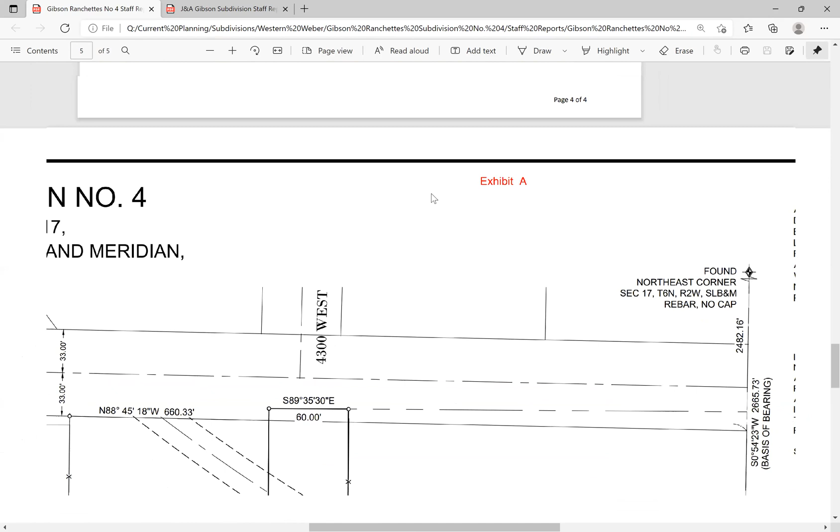So what this proposal does is create lots 1 and 2, which would be officially platted as building lots. There are already lots of record building lots because they have homes, and they already have the services they need as far as water, all the residential services. As you can see where my cursor is, they're just cleaning up this line—this label says original lot line—so they're basically officially platting these 2 lots.

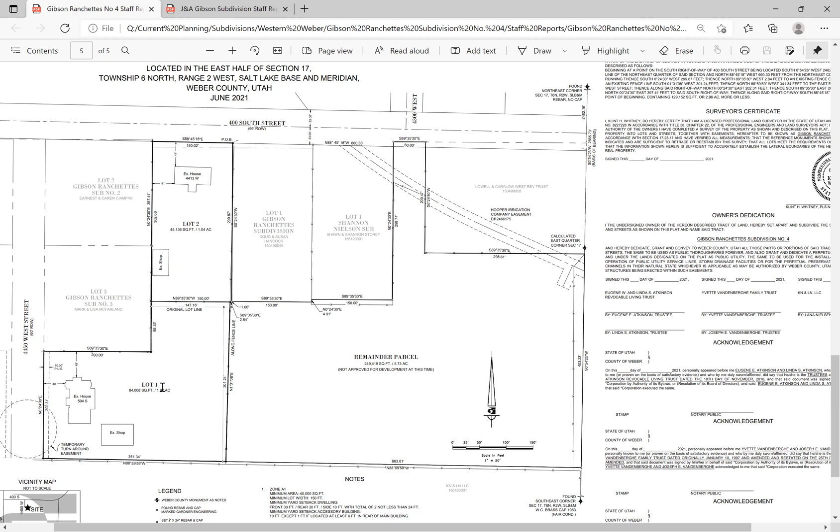You have this remainder parcel that is just over 5.7 acres. So what planning looked at was mainly to make sure it meets the zoning site development standards for the A2 zone, which it does, and that the plat meets the Weber County Subdivision Code requirements, which it does. As it stands, we have approvals from surveyors, engineers, and fire for this. It's a pretty simple amendment here, subdivision. So with that, planning staff recommends approval.

Okay. Is Mr. McFarland here? Nope. Okay, well, I am going to recommend approval of this subject to the conditions and findings outlined in the staff report. So it stands approved.

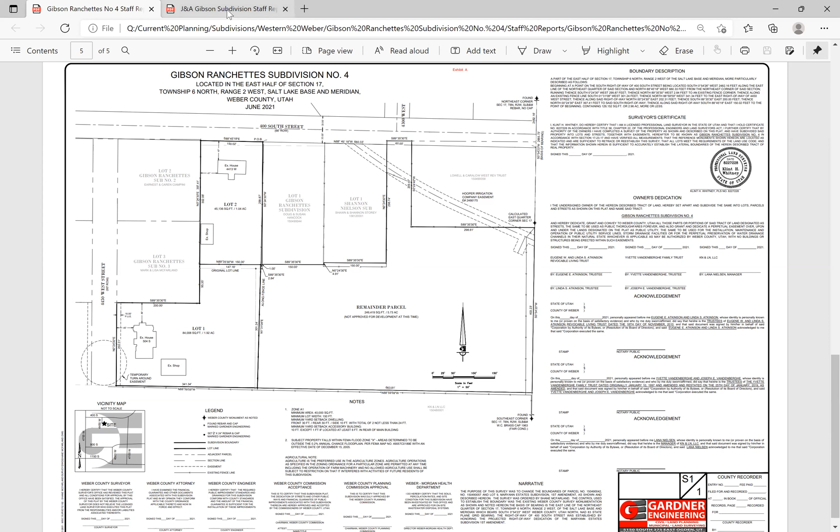Next item is consideration and action on a request for administrative approval of the J&A Gibson subdivision, consisting of 2 lots. And Felix, you're going to be presenting this one as well?

Yes, so this one is in western Weber again. It's a residential subdivision. This one is looking to create a new lot from an existing large parcel. What they're proposing to do is pretty standard: this new lot that's being created fronts on a public road that's fully improved and up to the county standard.

With this being a new lot being created, we require that they show us they have service from Taylor West Weber, service from Hooper Irrigation, and they've provided those required letters. Also, Central Weber Sewer District will provide the sanitary services for this.

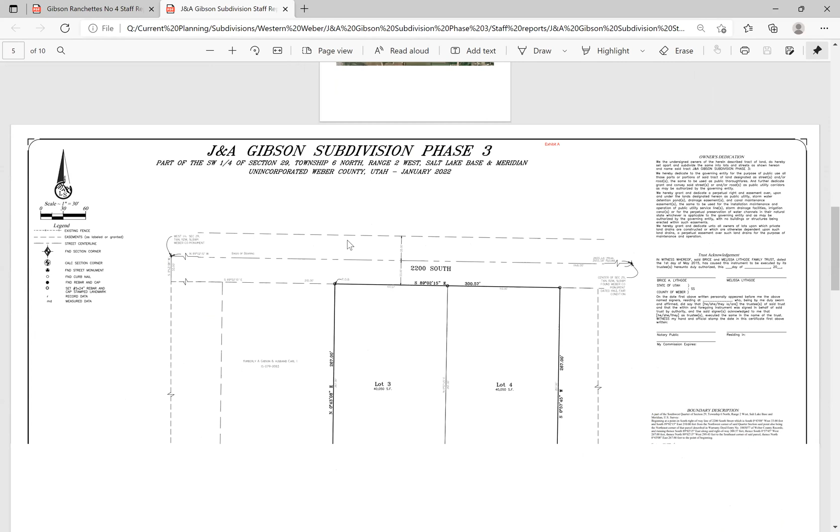Go to the plat—this one as well. So here are the lots showing kind of a layout, both lots fronting on that public road, 2200 South. Both meet the standards for the A2 zone. With that, planning recommends final approval of this proposal.

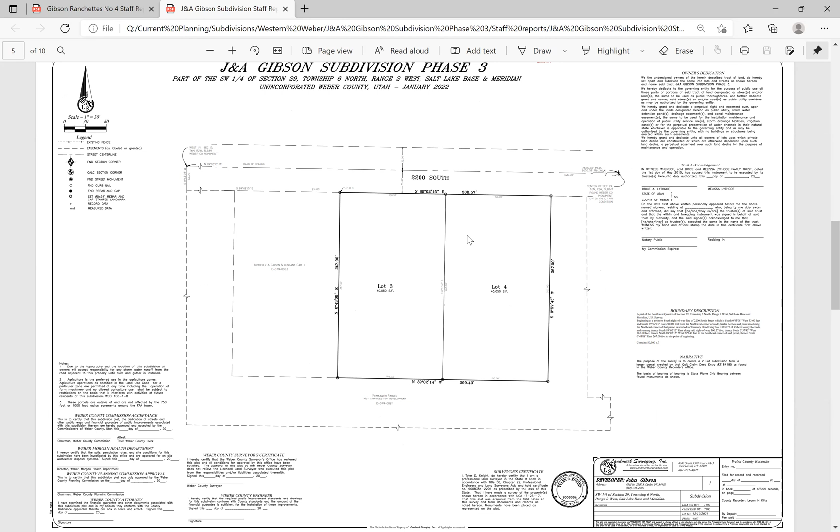No road dedications necessary for this? Nope, not.

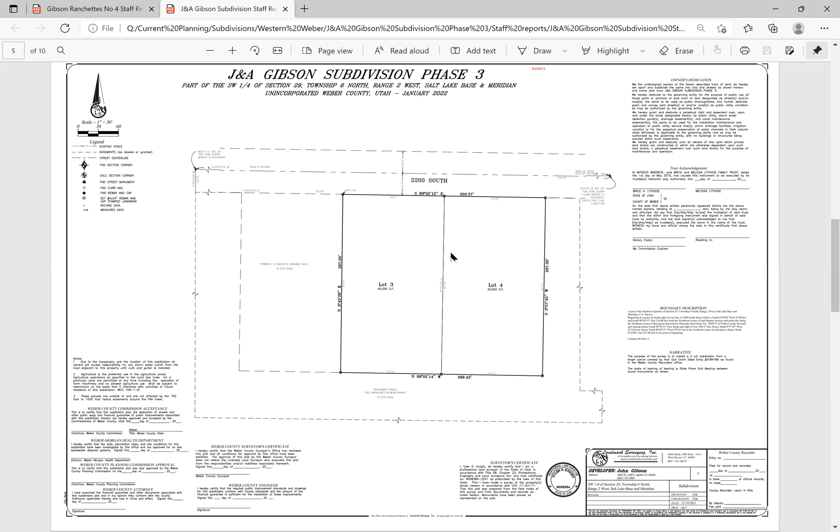Kobe Smith, do you have anything you'd like to add? We submitted a new plan yesterday, with marks the surveyor made. So this is just the older survey with the older plat that we originally submitted, and now everything's been fixed and the new plat is now in.

Okay, well, I'll recommend approval of it, subject to the conditions and findings outlined in the staff report. And we'll move on to...

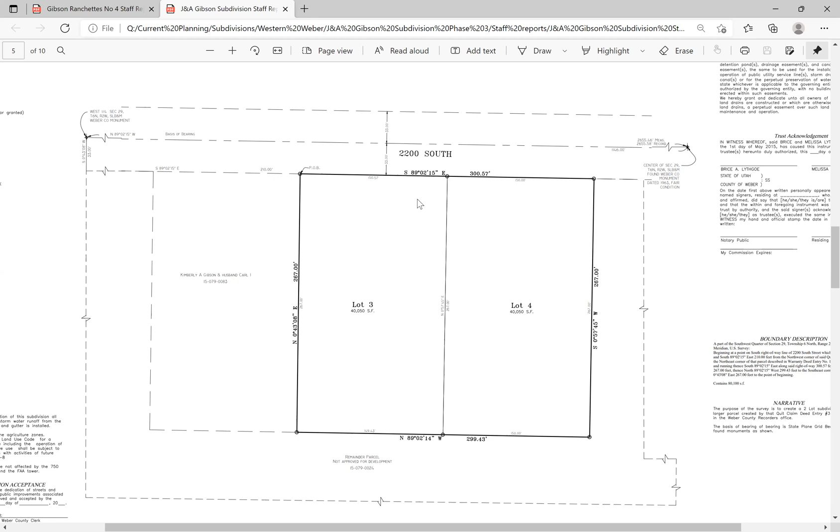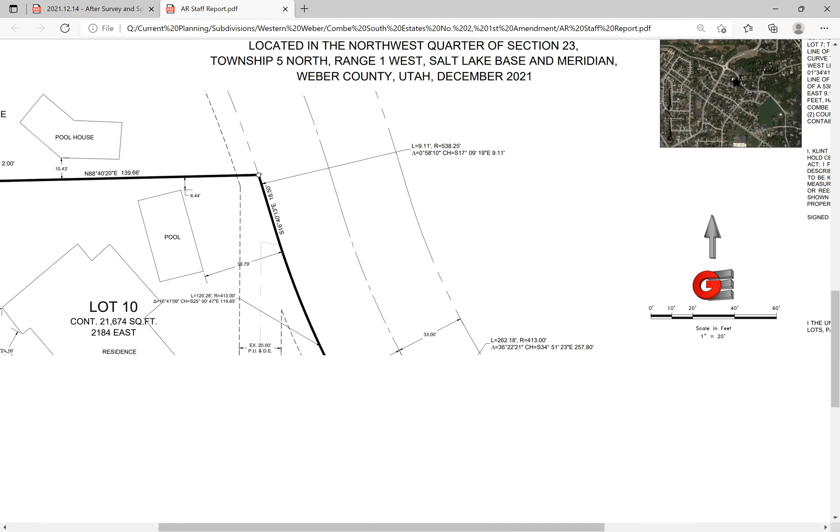I'll show you the plat and what's changing. They're keeping all the existing easements. You can see this line in the middle is where the property line used to be, and they're proposing to just bring the property line down in this location.

Okay, I also have an aerial view of it here. Do we have, where it's a double fronted lot, are we having restricted access? Where it's on the cul-de-sac and then Combe Road? There wasn't in the original subdivision.

Let me look at the review of it here. Did engineering, they didn't mention anything about that. And then maybe when you're looking at the review, and maybe you know this, the water line easement, it's going between lots 11 and 10.

Do you know what water line that's for? An existing water line easement. So to answer your first question, our engineers have asked, yes, for a no access line on an updated plat, along Combe for lot 10, good, so they don't use that as an access. It's an existing water line easement.

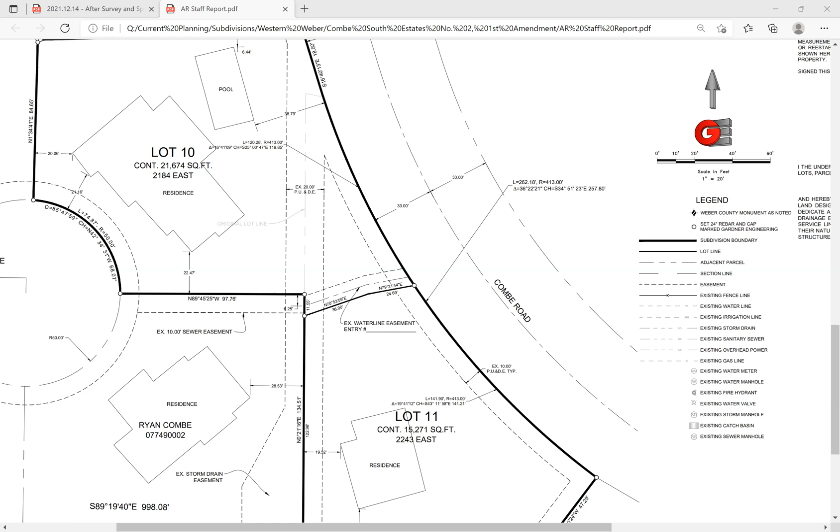Just on the south side of lot 10. You see that, I do not know whose company it is. I'm assuming that the surveyor who prepared this plat is ready to reference that entry number. And engineering didn't make any comments on that. No, okay.

Utilities that I'm aware of that could be involved would be the Uintah Highlands Water Improvement District, or potentially the basin secondary sewer line, or water line.

Well, I don't see any problems with this. It doesn't look like Corey Combe's here, so I can recommend approval of it, subject to the conditions and findings outlined in the staff report.

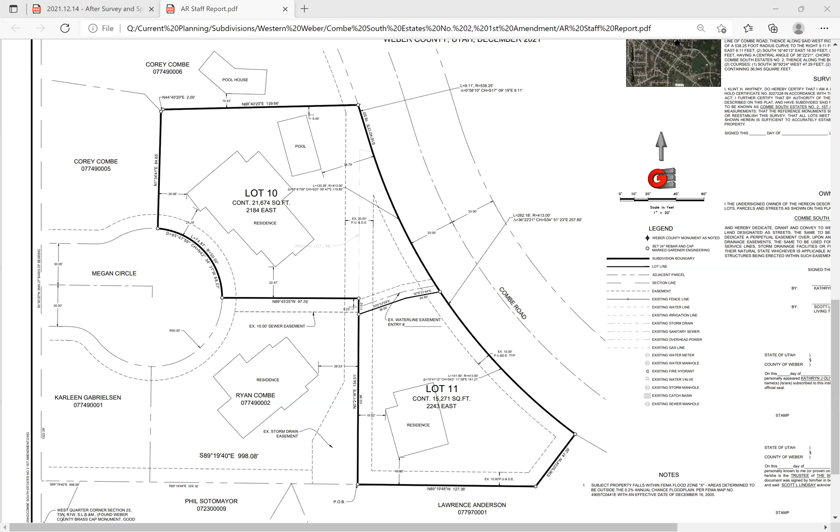And last item, 2.4 LVS 102521, consideration and action on a request for approval of Summerset Farms Phase 4, First Amendment. Ms. Aydelotte, you're going to be presenting this. Yeah, Felix is going to pull up the plat.

This is a lot line adjustment as well, Rick, between two lots in an already platted subdivision. So you can see the existing dedication plat right now. The applicant is looking to push that eastern boundary between 400 and 401 about 3.7 feet to the east. Since it's a lot average subdivision, the areas and widths of these lots are still going to be able to meet zoning. This is located in the A1 zone.

Staff would recommend approval of this subdivision amendment, subject to the condition in the staff report, which is a renewed deferral for curb, gutter and sidewalk along that 3500 West Street. Pretty straightforward. Mr. Favero, do you have anything you'd like to add? No, okay.

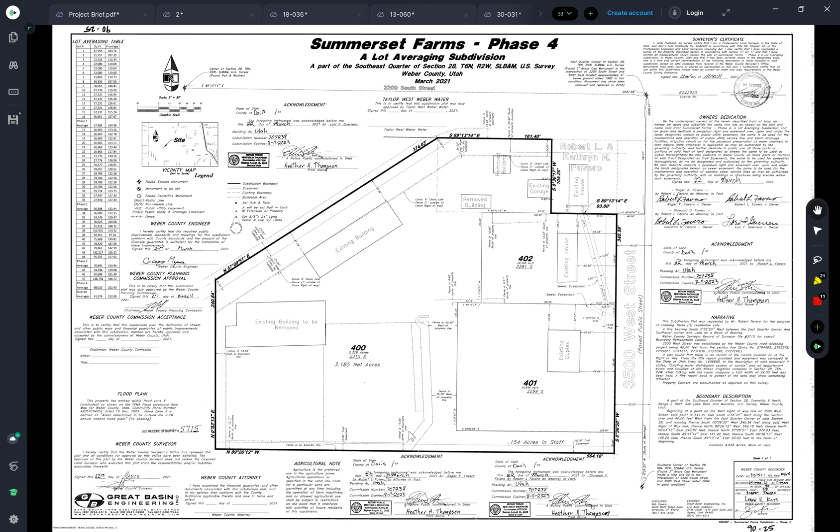Well, I'll recommend approval of this, subject to conditions and findings outlined in the staff report as well. This meeting went fairly slick, so we'll take that. This meeting stands adjourned. Thank you, gentlemen, for coming.

Rick, you want to sign that? Yeah, for sure, get me that, I'll get you the renewal of that curb and gutter thing we need. I thought with all those items, we'd be a little bit longer.

That's tagged as a final proposed plat. Once they've got all that, we can record that new deferral with your final plat. So I'll get you a notice of decision tomorrow. Thank you, sound good? Yeah, you got it, thank you very much. Thanks, Bob, good to see you. Good to see you, hope your day gets...